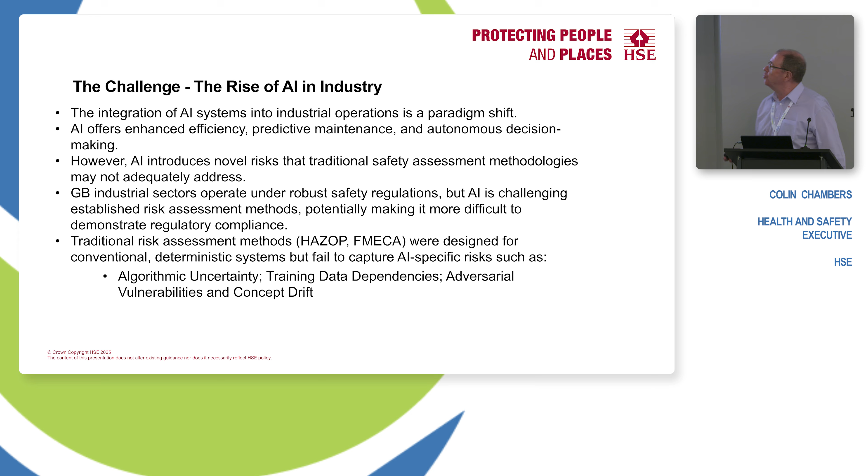So what I've proposed is that if you look at the risk assessment landscape associated with manufacturing industry, you'll see that there are methods to identify hazards, methods to assess the failure modes that are associated with these hazards, methods of looking at root cause analysis, and then methods at looking what can you do about it and how effective are the mitigations for these. And so these four techniques in traditional high hazard industries can fulfill those requirements. Now these are not the only techniques, but these are examples that I'm choosing to look at.

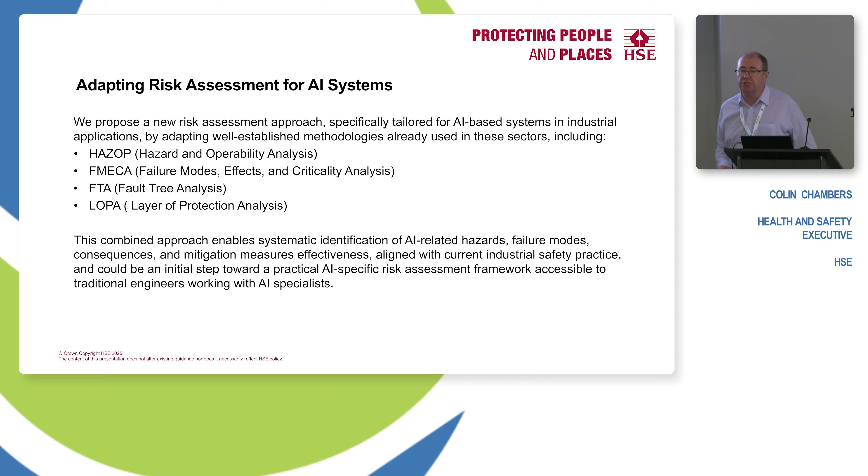So in terms of HAZOP, we look at introducing new guide words that are relevant to artificial intelligence. Misinterpretation, overconfidence, drift, words like that. In failure modes analysis, we focus on AI-related failure modes, like adversarial attacks and training data issues. In fault trees, we account for things like algorithmic branches and their failures.

And in layer of protection analysis, we look at what are the mitigations that work to protect against these hazards and failure modes, and how can we ensure that a combination of diverse measures can help reduce risk.

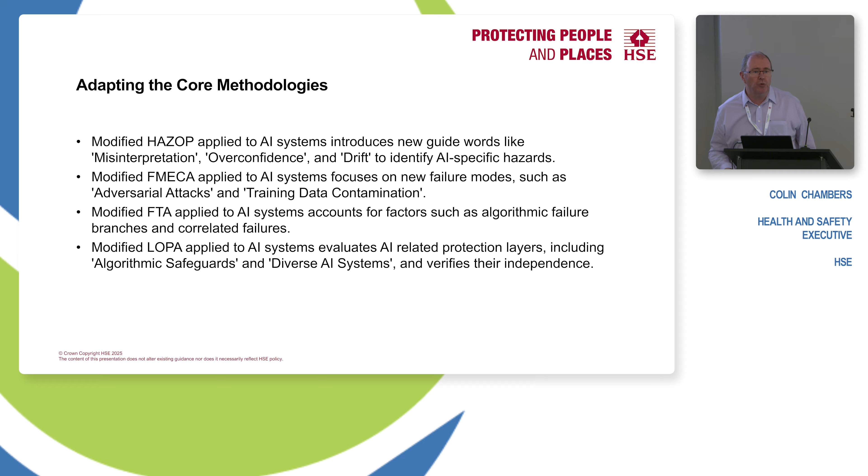So first of all, I thought of a small case study with which to apply this. And then I went against all that I go to companies for and asked them, is this a one-person assessment? And went and did this myself. But all I'm looking at is outlining a possible approach. And hopefully lots of people can say why it isn't possible and help to give improvements.

So if we look at an autonomous guided vehicle, whose job is to pick up materials, deliver them to a processing machine, then pick up the finished product and take that somewhere else. And you might think, well, not too difficult. What's wrong with the normal guide wires and magnetic strips for doing that? But what about when your workspace has lots of people who seemingly are at random places and locations, lots of other vehicles, guided vehicles, and so on.

And when you've got all of these issues and all of this randomness, then the use of standard guide wires and magnetic guides for routing from one part in the workplace to another are suddenly very ineffective. And so you need something that can look at all the information, make relevant routing decisions, and minimise the amount of downtime and maximise the efficiency.

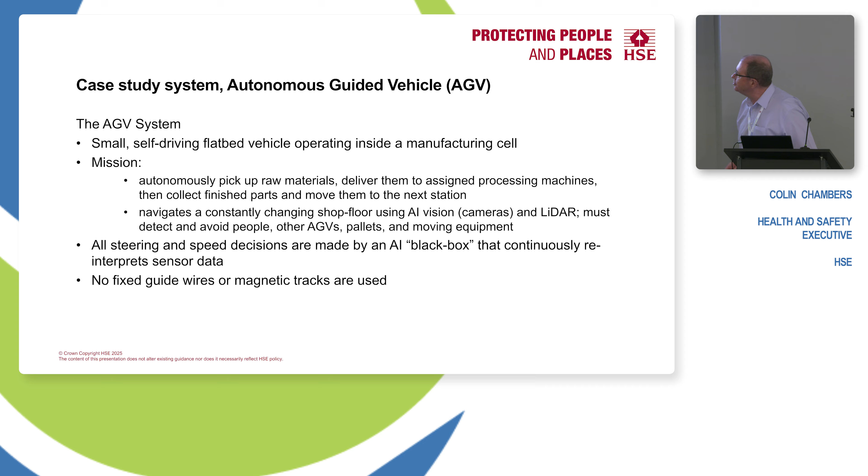So, let's have a quick look at an example excerpt from a HAZOP study, from a hazard and operability study. And I'm only going to go through one. If we take as a node the AGV navigation system, and we're particularly interested in this case at the sensor input, and we're applying the word misinterpretation.

The AGV effectively misinterprets reflective floor as being an open space. And this can be caused by environmental glare, it could be caused by problems with the sensor calibration, and there are a lot more reasons why this can be caused, but it can and does happen.

What are the consequences? Well, you can have a collision with either an obstacle or a person. Either way, this is an undesired effect that not only could cause injury to workers, but cause loss of productivity and other similar negative aspects for the company.

So, as is common in this type of assessment, we always write down, what do we do at the moment? What have we already got? And in this case, there's a possibility that we have human remote override, and somebody can press an emergency stop button, which brings everything to a safe standstill until the problem is dealt with. But that's actually not much of a response at all, because it doesn't add any benefit of having artificial intelligence.

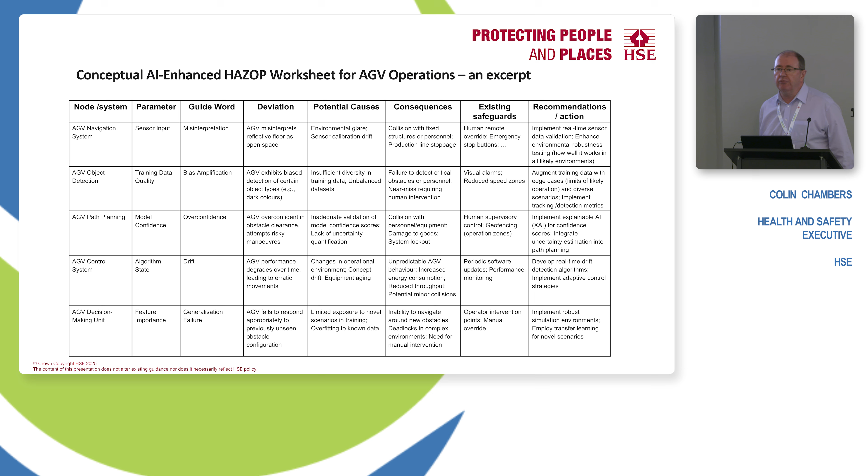So then we have a look at our adaptation of failure modes, effects, and criticality analysis. And we'll just go through the top example again. So if we look at the AGV vision system, its function is object recognition. A failure mode that we want to look at could be contextual misinterpretation, failure to interpret its environment correctly. And the causes, again, lighting, placement of objects. The list is continuous, but we only put a few example ones in.

And the effect on the system is that the vision system could give incorrect information to the navigation system, which could result in an incorrect path deviation, which could then lead to collision or other things.

Then we use the risk priority number, for those familiar with FMECA. And we think it's got a high severity, it's marked out of 10. A mediocre probability of occurrence. And then the detection, which is worked inversely, so a higher number is bad. Then failure to detect is a problem. And what we do there is we end up with a risk priority number, which is a ranking number, which enables us to look at what are the worst problems, and that can then guide our effort into what we deal with first.

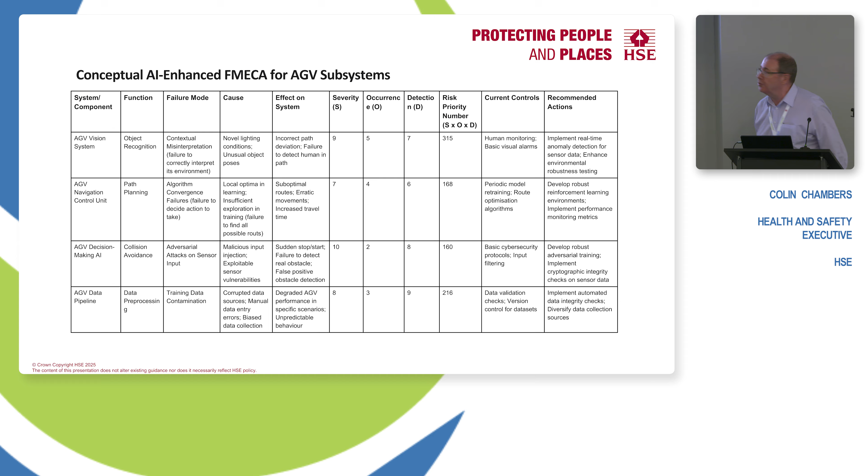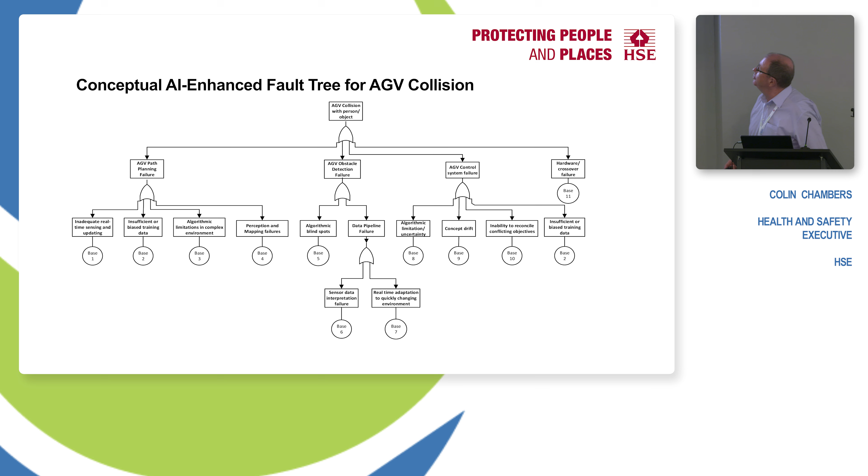Here's an example fault tree, and we can look down the different algorithmic paths, and we can look at the root causes of path planning failures or obstacle detection and so on.

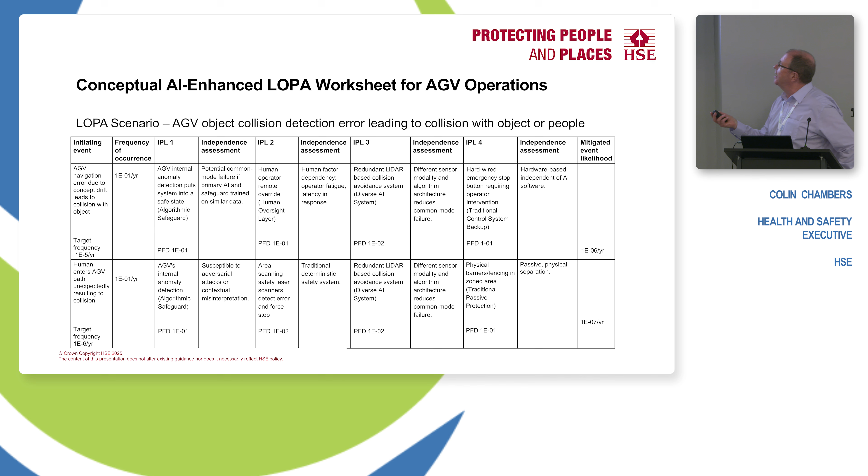So what I've gone through is a demonstration of how we can identify hazards and analyse the failure modes in depth, look for root causes, and then look to see what type of combination of protection layers can best mitigate against these. So really the conclusion from the case study is the root causes seemed mostly originated from the data pipeline and algorithmic issues.

In reality, a lot of the risks are dynamic in nature and evasive, and you wouldn't necessarily find out until something had happened and you'd further analysed it. We found that data quality and concept drift can continuously reshape the risk profile, so hence the one-off risk assessment is no longer a viable approach in AI-based systems. We found that it's actually quite difficult to determine the independence of AI-related risk reduction techniques because of a lot of interdependencies.

So in suggested mitigations, this is a piece of work I did myself, but continuous life cycle management is important to look at things like drift detection, retraining triggers and bias audits, and you need a life cycle approach to implement those on a continuous basis. And we also think that diverse safeguards, including algorithmic, human and physical controls, are needed to reduce the risks of AI-based systems like this.